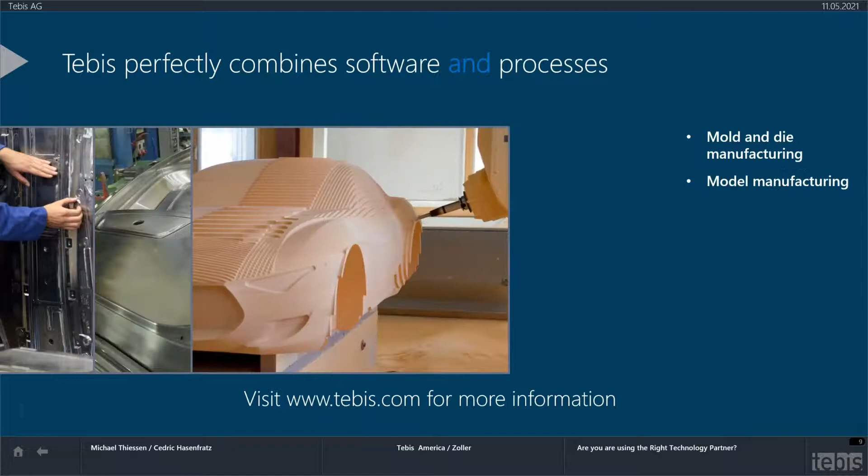Now, what does TEBIS do, and what do we stand for? TEBIS combines all of the software and the processes all together in one, not just for the mold and die manufacturing area, but also for the model, the industrial design, the aerospace, as well as the production machining areas. This is where TEBIS really shows its strength, where we're putting all of the processes in place and helping you as the user and the clients to really get the maximum power out of it.

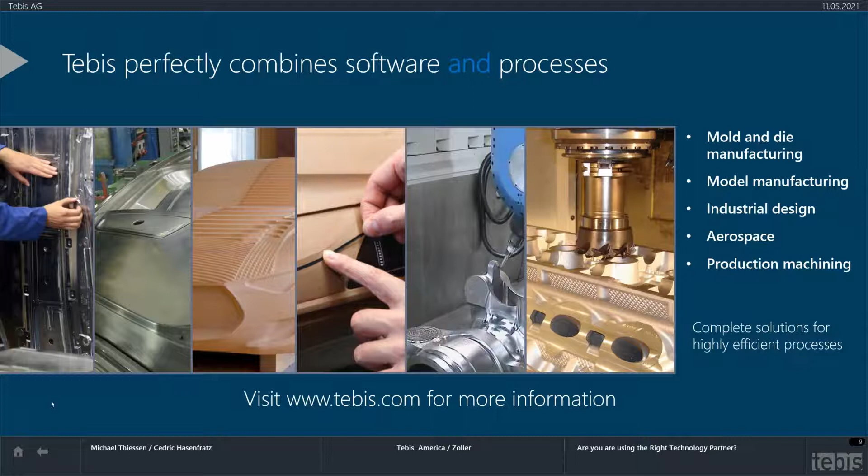Thank you, Michael. We'll look at here and keeping it all digital. So this is the major topic of today, really showing a nice flowing interface that's really nicely synchronized without having to push any buttons and update our tooling source right over to TEBIS. As usual, we have different packages that we offer. We're going to talk mostly today and cover the bronze level on the Zoller side.

And when we open up that slide now, I'll have maybe Michael jump in a little bit too, but you can see here in the first place on the left, you see the tools of the Zoller TMS database, the complete tool management solution, where everything resides and will be transferred right over to TEBIS, and not really transferred, because that's very special today compared to other interfaces that we have. It's pretty much synchronized. And maybe I'll let Michael quickly talk about this slide too.

See, this is the beauty about Zoller and TEBIS together. This is really a handover between the Zoller TMS system and the TEBIS PDM server. Everything is live that we do. There is no pushing of data that comes across where you just copy it and you're stuck with it. That's the beauty of TEBIS, and the principle is exactly how it lays out. It's a live handover, and because the Zoller TMS is so unique, it's a real pleasure to show you this information.

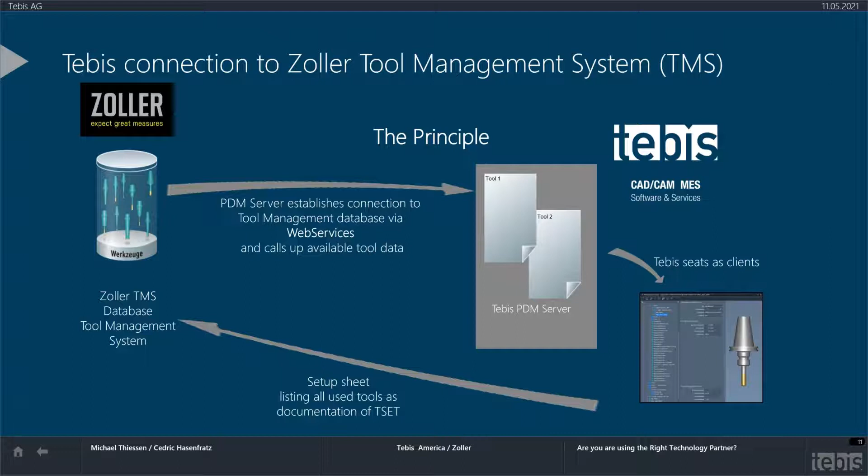Looking at the next slide now, we would like to go more into the actual transfer of the tooling or setup sheets and what we're actually transferring. Again, this is synchronized. We don't need to push buttons, as Michael said. It's a really seamless workflow, so all the updates you make within Zoller will be automatically updated right over to TEBIS from our central tool database, which again will be verified once we push the setup sheet back.

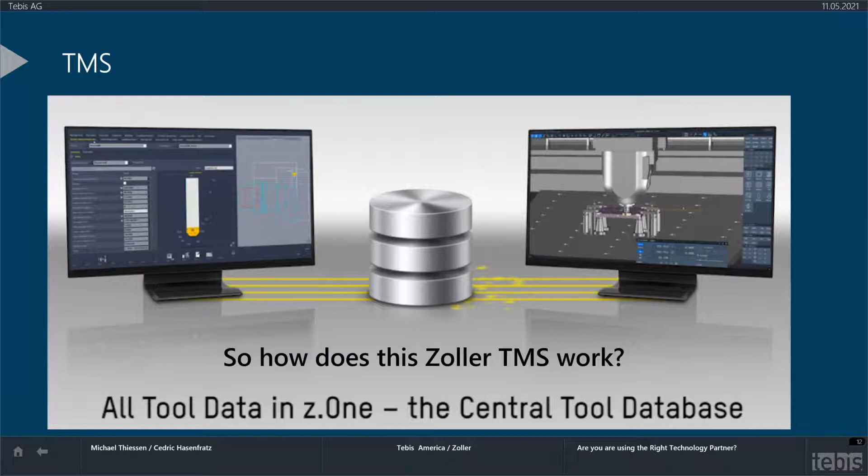The data exchange, basically step number 1 here, is an automated import, as I mentioned. So all the tool data from Zoller is received in TEBIS pretty much at the same time. You have the real tool data being simulated within TEBIS. So all the tools that you assign to each of the tool paths will be simulated. And afterwards, as we verified everything, that data or the complete setup sheet, the job, will be transferred right over again to Zoller to have a clean, centralized database ready to use.

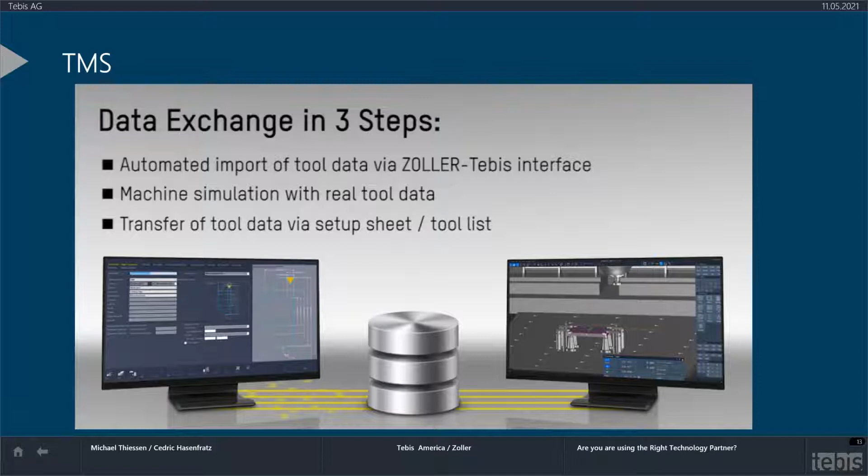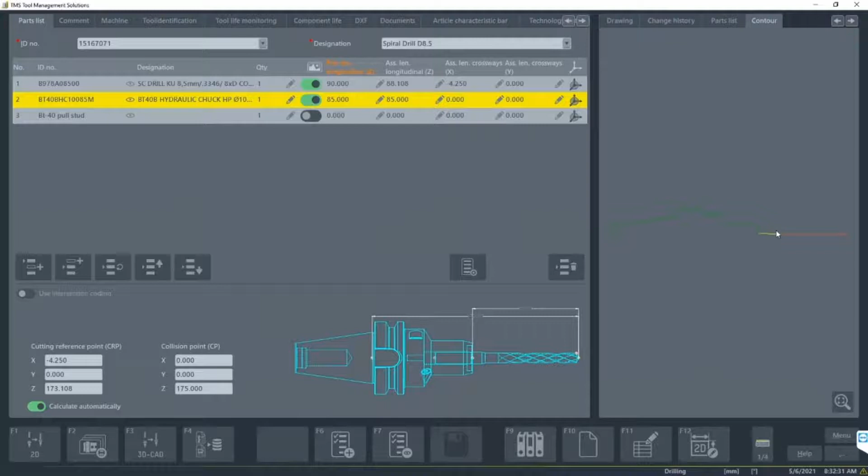Step one. And we're going to make here a little bit more of a live demonstration. You can see here the Zoller interface with our widgets to the right side. We're going to open up our groups. Here is a drilling. You see the group TEBIS. I picked my first drill here to quickly give you an overview on what this all entails. You see graphics. The contour is right there with the non-cutting portion of the tool and the cutting portion, which is in red.

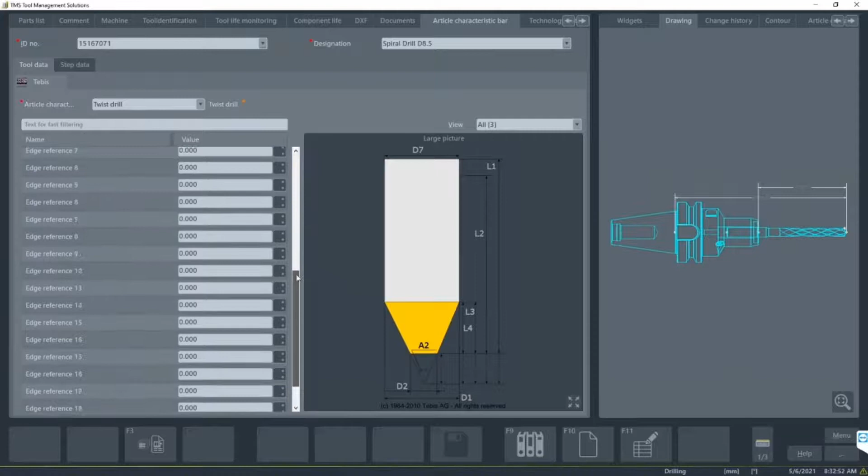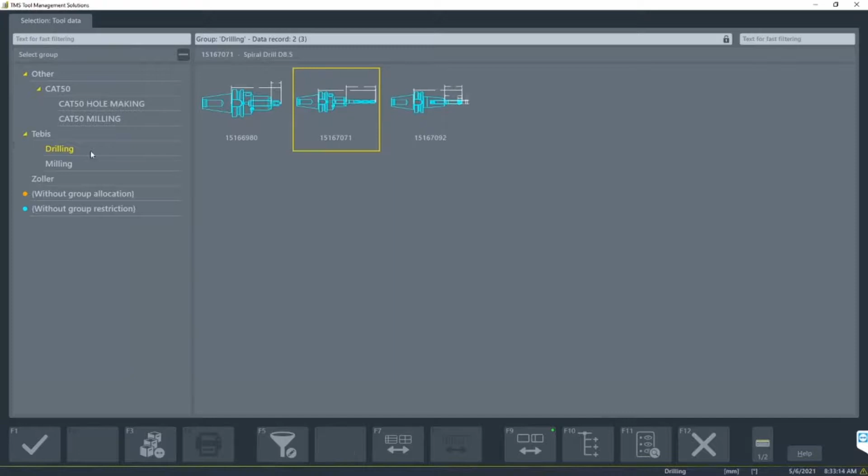Then we also have the drawing, as you could see here, the 2D drawing. Then we got our characteristics, which we obviously want to read into TEBIS. So you can see nicely here all the different references of the cutting edge, plus the diameters of the tools. The technology data comes with that, so we can really define it by different materials, by different machining types. All the speeds and feeds are part of this. And last but not least, again, your complete parts list of that drill. And we're going to look now at a milling tool.

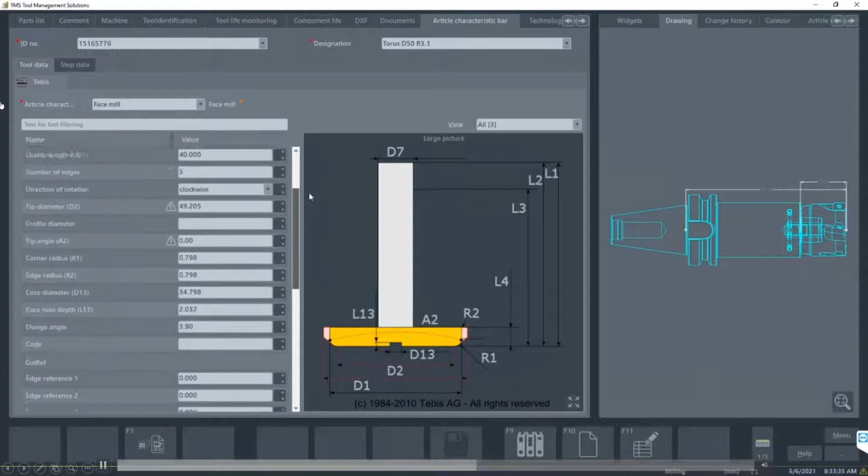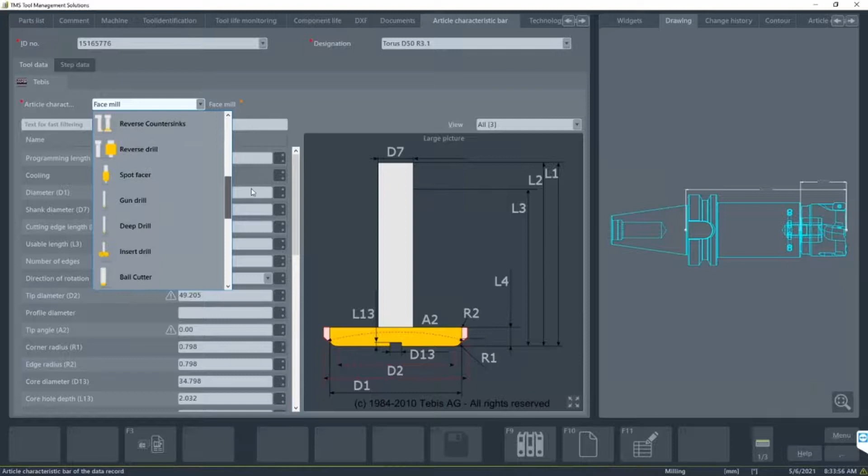So from here, we have the same exact screen with the same information and description of each tool. Here we can see the characteristics of the face mill. Again, same principle based off the ISO standards. We have all the parameters that we need to be transferred over right to TEBIS and what TEBIS is able to read. And you can see there's different characteristics that we can use for different end mills, which is a very big and beneficial feature within Zoller, that you have not just the one end mill or one drill. You can really choose the exact one that you need, such as spot drills, deep drills, and so forth.

So that said, same here, technology data is part of it. We have 3 different applications, 3 different materials. Might go on different machines too that we apply it to. And I give it over now to step number 2, basically transferring the data. So it's very easy, as Cedric already said, really easy with 3 steps. And now he has done his major portion, because we know the tool management system Zoller is so precise with all the items that are in there.

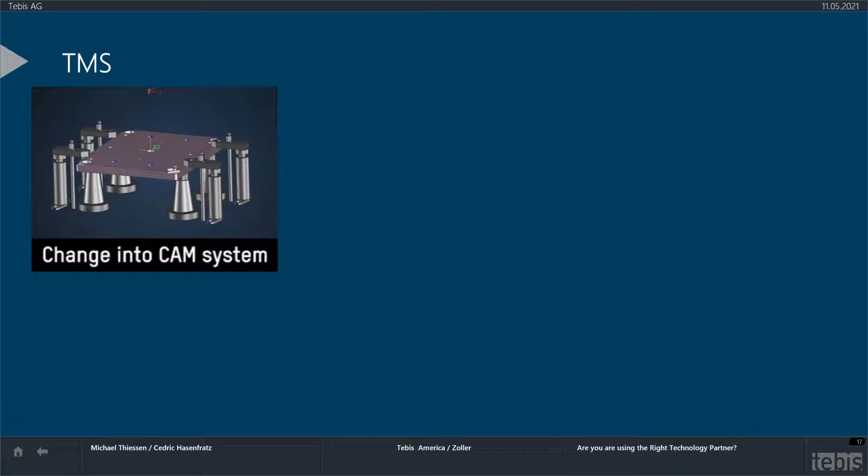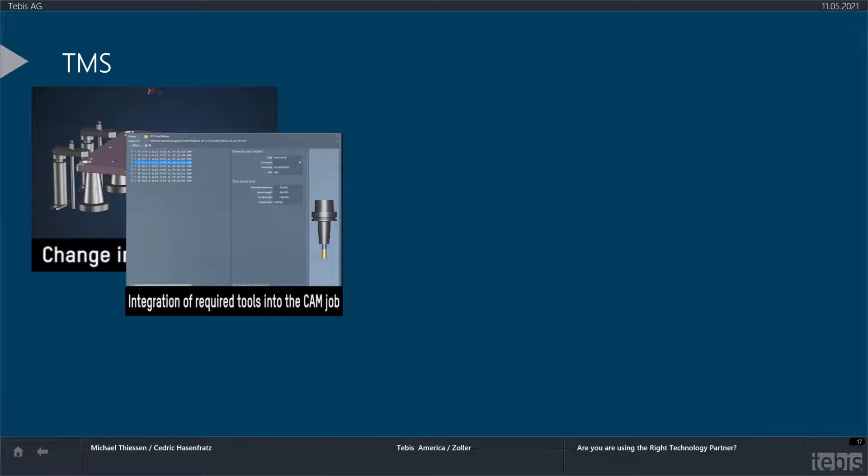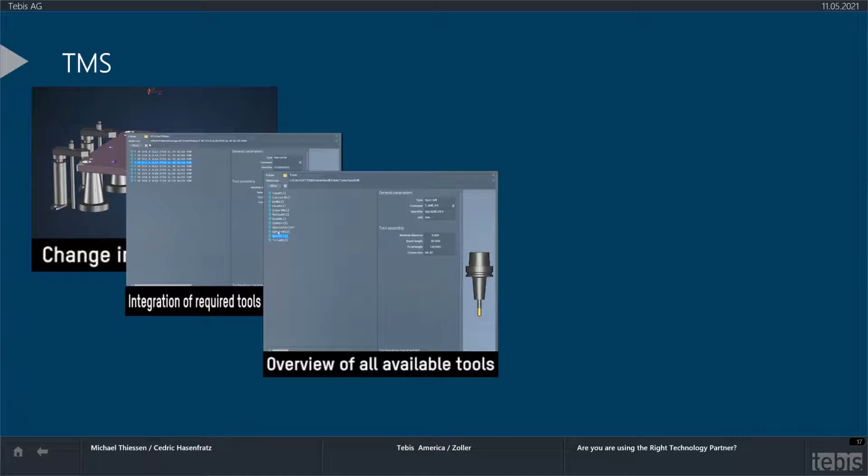Now what's going to happen is I'm going to change it into the CAM system. I'm going to bring it into TEBIS, and there's also a couple of steps that I'm going to bring up here. One is the integration of all the required tools into the CAM job that are exactly defined by the TMS at Zoller. I'm bringing all this information into TEBIS. I'm going to quickly look at all those tools and make sure that all the information came across and verify that everything is kosher. And then after that, I'm going to make sure that all the technology data that Cedric mentioned earlier for all my different materials are also there.

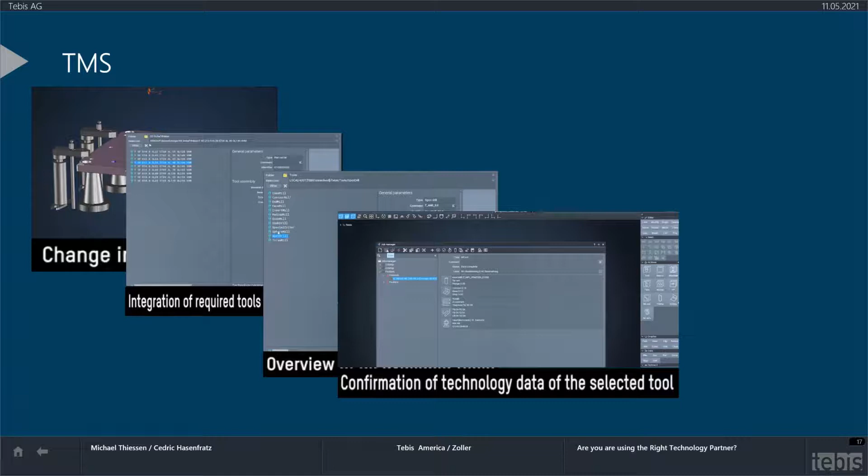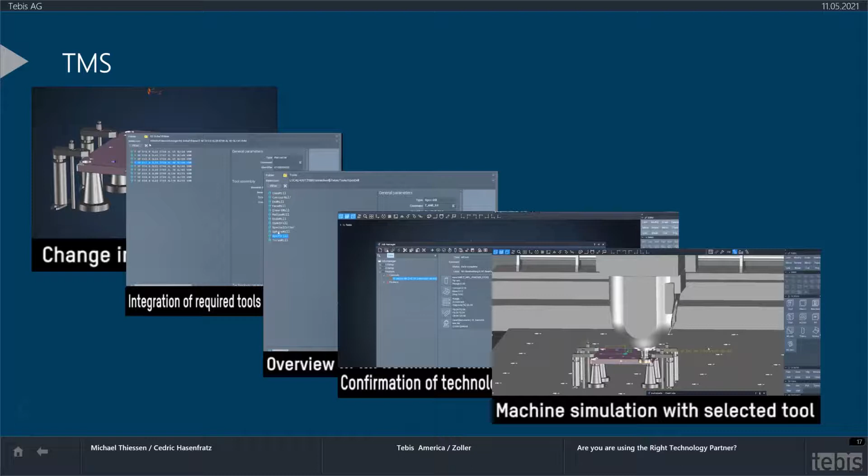And last but not least, as we said earlier, the last step is I'm going to look at the machine simulation and make sure that all my selected tools are verified. So for that, let's look inside the TEBIS environment at how that TMS is really connecting live. So here we got our part. I'm going to go into my tool and let me explain how this all works. As we said already, this is a live connection to the TMS system. So as I'm looking at these tools, I'm sending bits and data across.

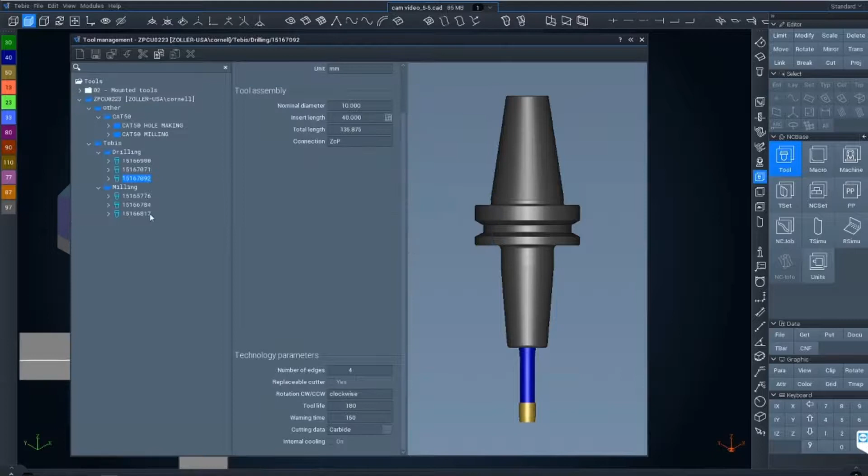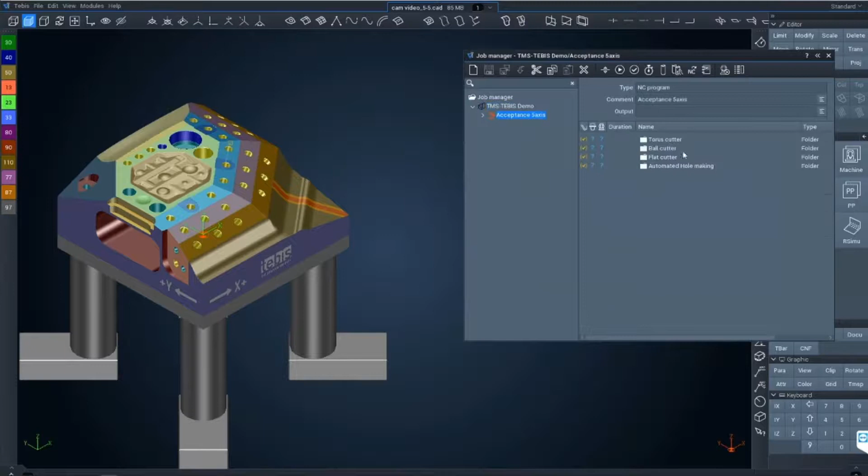I'm looking again at all of the tooling information, the technology data with all my feeds and speeds, my step overs, my technology data on the materials I'm going to use, my step downs. All of this information is already embedded inside the tool. This is why it's so important to have a good looking and good functioning tool library. It's all about automation, and the very first step to automation really is to have a clean, functioning and powerful tool management system and a tool library to house all of this information.

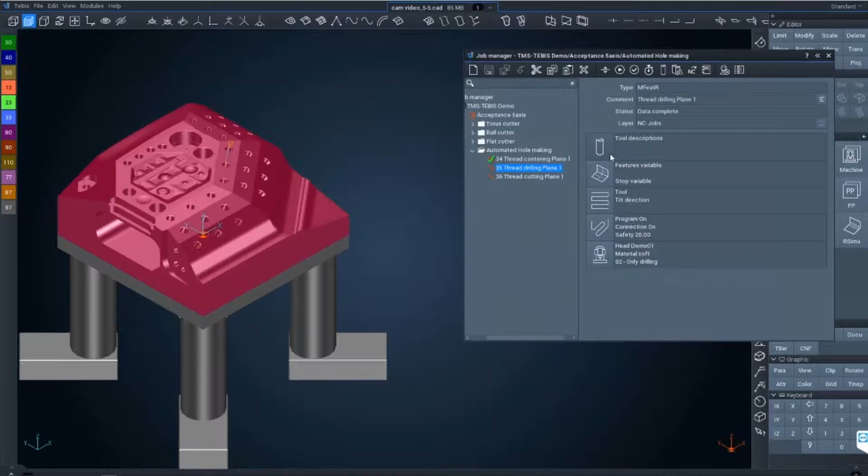So now what I'm doing here is looking at my automation setup. In this particular part, I've set up everything in a fully automated fashion so that my variable tools can automatically go out and select the appropriate tools from the TMS for my operations. Because sometimes I have holes that are a little bit deeper than others, and I need a longer flute length. Having a variable tool setup and variable tool selection, I can now select the appropriate tools depending on my tool type, my diameters and my length. Now, this particular item here is very unique. Even all of my programming efforts are fully standardized and fully automated.

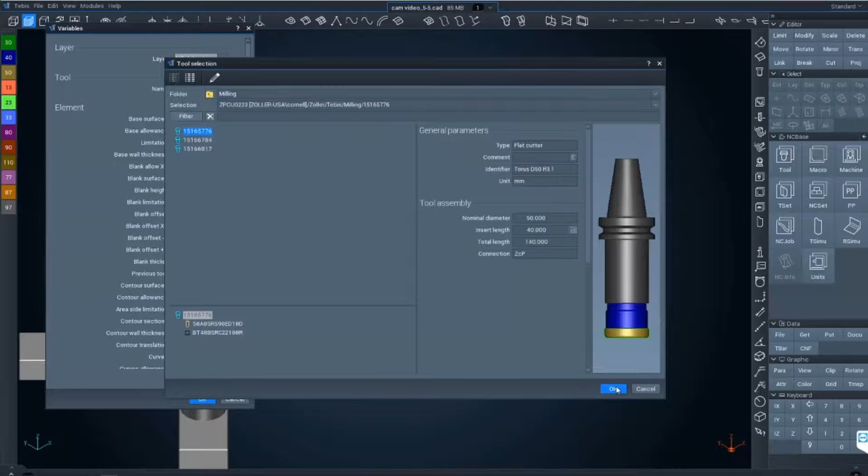Every single item in here, in terms of surface selection, you will not see our experts select any surfaces, because why? The software knows exactly which layer, which object layer it needs to get to in order to calculate the job. This particular job is actually our post-processor verification solution. So we check all of our posts with this tool.

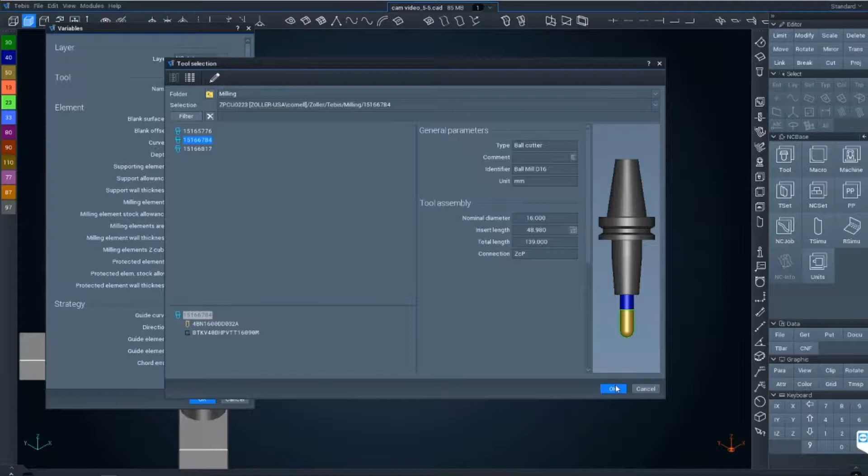So now, again, all of my tools are there, all of my technology parameters are there. All that I really need to do is execute all of this. And the biggest thing besides the automation is the standardization. Standardizing your way across your entire shop floor. Having your tools with all your technology data available. Now it's just as simple as saying execute all, and you will see all your check marks are going to get filled in by your tool path.

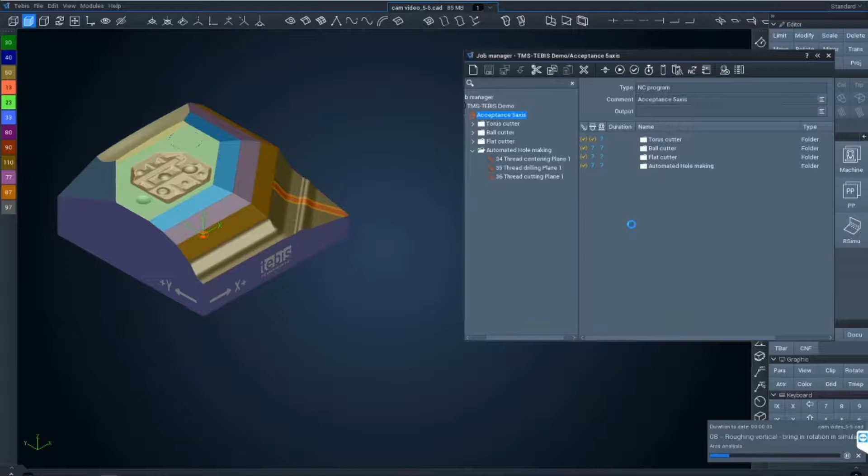This is live, it's not pre-programmed. So I'm going to hit execute, and you will see these tool paths getting calculated. On the bottom right side, you'll see your progress bar, you see your check marks appear. And what I'm doing, which is also very unique, it not only goes through and does all the programming of this particular part, but it also automatically does a tool check to make sure that the tool the TMS has given me is safe for its programming operation.

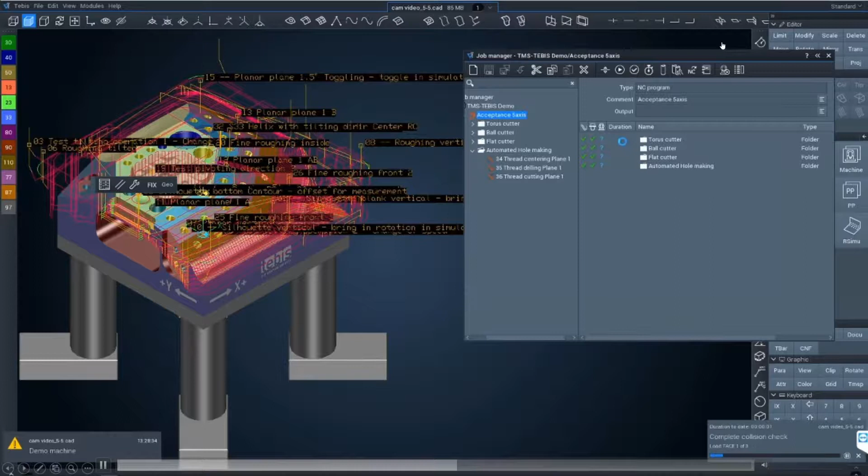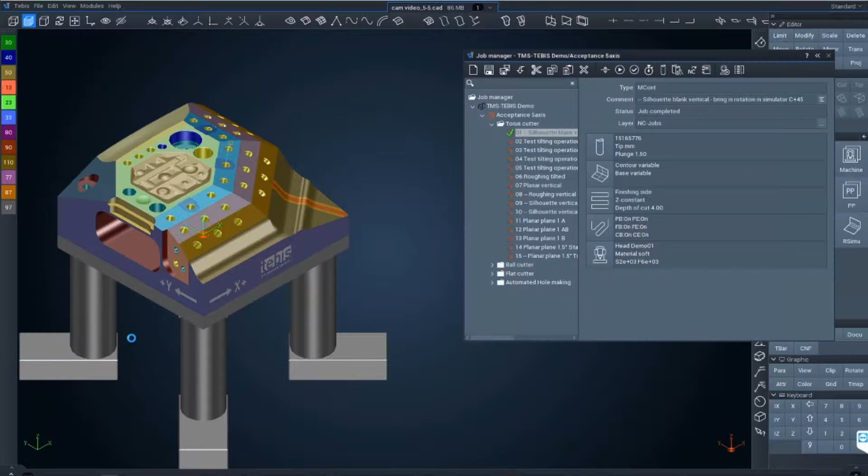And now the last step, fully automatic, I'm going to go through and simulate every single movement and every single item on this particular job in my full simulation. So now this job is ready and capable to run on the machine completely unattended, completely lights out, and it gives me real characteristics of the machine kinematics outside the machine with real numbers on the machine runtime, because I'm utilizing the kinematics, the acceleration parameters and the look ahead on this particular machine.

Very unique, very accurate, so you know exactly when this particular machine is going to go through with its programming. And every single motion that this machine does is completely verified. Even the tool changer. When the tool gets exchanged, we're checking the simulation over to the tool laser.

Because at the end, we need to recognize this. The tooling that you've purchased from whatever tool supplier you have is not a cheap amount of money. It is probably very expensive, these new tools. So keeping these tools as new as possible is very important. That's where the realism comes in place, making sure that the realistic view on this particular tool and all of its motion inside the machine is 100% identical.

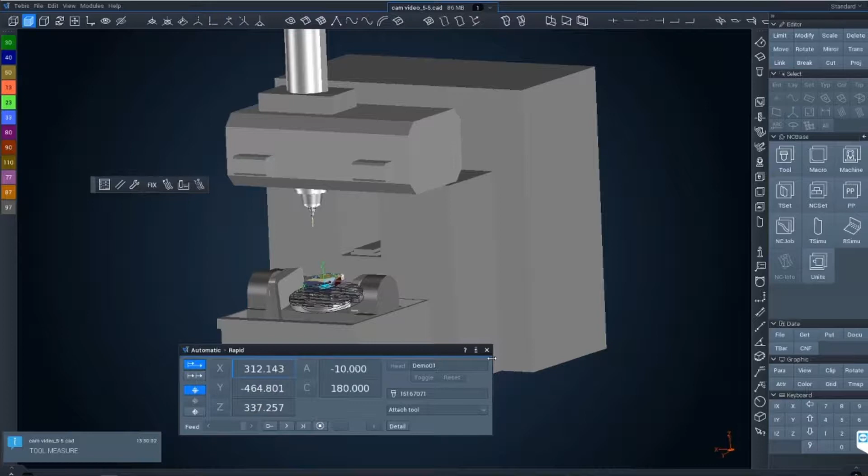I'm going to talk a little bit later on about the tooling, but I cannot stress more how important it is to have accurate tool information with all of the feeds and speeds and the parameters embedded already from the beginning. And now I'm going to do full automatic documentation for all of my programming efforts, fully automatic. I don't have to touch anything.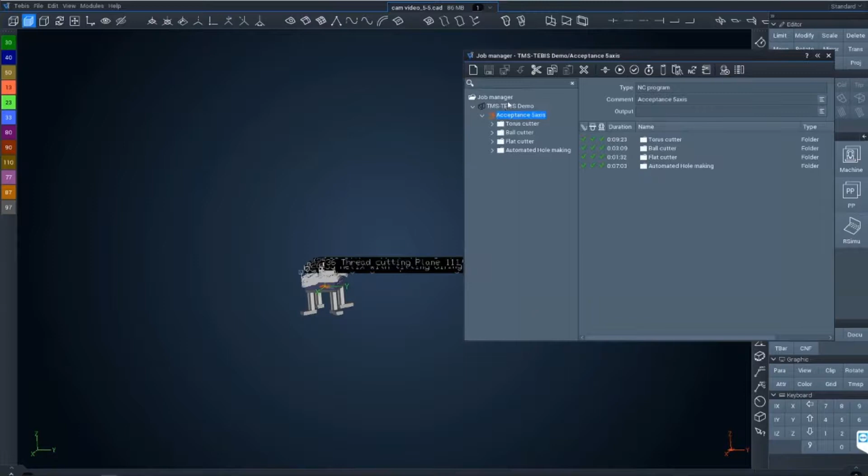I put the file name in that I want to call this. Maybe I want to put an additional comment slide with an additional picture. This is all doable. This is what my expert is doing right now, just putting a description in there. You can add a picture to it. And now your team outside by the CNC machine has the exact lineup, the exact programming of your part in a nice list format that they can follow. And they can even have a viewer by the machine to really put the realism to the next level.

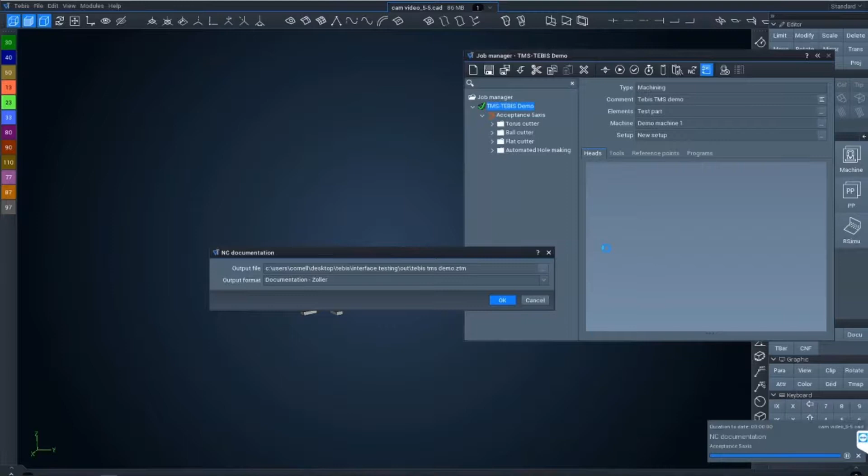This is how important this TMS connection to TEBIS is. And this is very unique, and I cannot stress this more. It is a live connection to the TMS. It is not a dump into a directory where you have to re-post it out from the TMS. It is a direct connection. So now, after I have all of this done, I'm going to hand it back to Cedric, because there is this step 3 that we're going to be talking about.

Thank you, Michael. I really like what you showed us today with a really good verified simulation. Looking now at the next step, we want to bring our tooling back to Zoller. Everything is verified and we have correct tools. Everything is assigned. The part is done. We have a finished part.

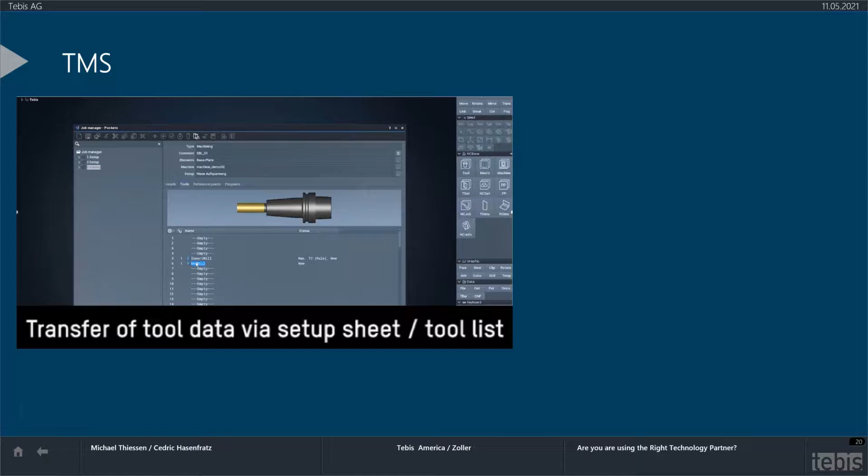We would like to bring everything back now as a complete setup sheet. So let's transfer all the tool data via setup sheet or tool list to the ZOLLER TMS single source database. As we can see right here, for our ZOLLER customers, everything looks familiar.

We have here our tooling, and the actual screen you see right in the middle is the same exact screen as you usually see on the presetter. So all those measurements are still part of that too, and the actual DXF graphics right to the right side. So let's see how this actually looks.

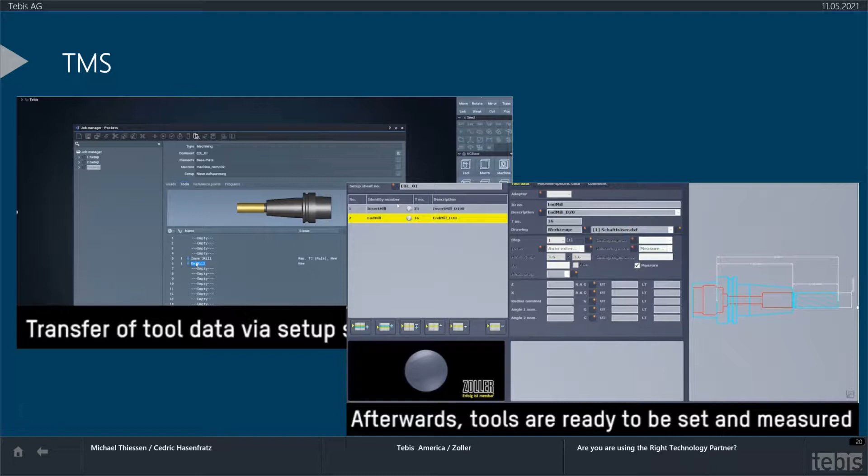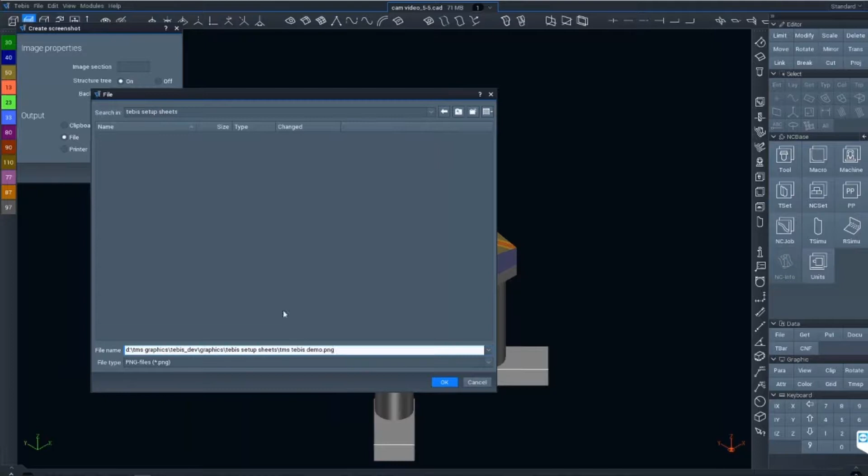With the demo piece of it, we have here the finished part view, which we basically want to also bring as a part for our setup sheet and give this a quick section name with the actual file name to it, like Michael did, and confirm that. So we're going to just put here the TMS TEBIS demo part and confirm this right over now to our database. So that finished part will also now be taken as a screenshot that we can have as part of our ZOLLER TMS setup sheet, our tool setup sheet.

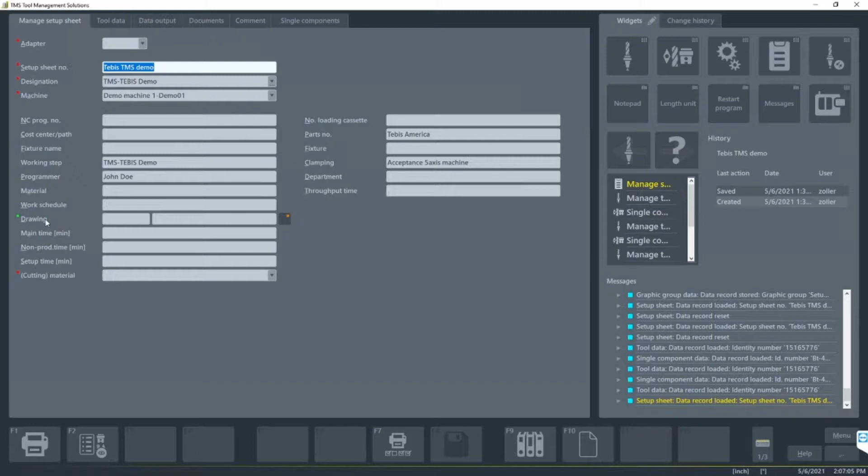So here we go. This is our main page for the setup sheet. We're going to look right here with the live connections, the TMS demo. We have the drawing now that we can pick from our graphic folder. And here's your finished part view that we now confirm and is now part of our setup sheet. Pops up right here on the right-hand side.

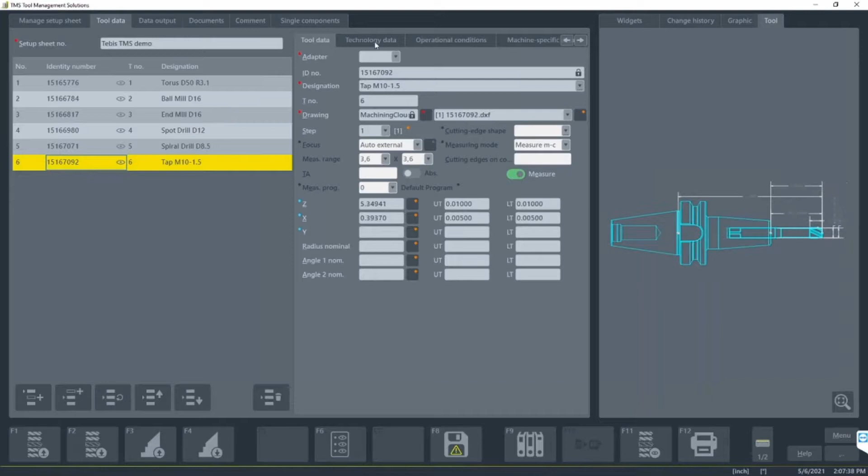Let's take a quick look again at the tool data. So again, to the left, we have all the tooling information, where you can also look at the contours and the DXF graphics. They're part of it now. And of course, again, all the measurements that we have from our presetter with the Z and X tolerances and the actual measuring modes. Technology data is part of the setup sheet that we have. We now can save this. Everything looks good.

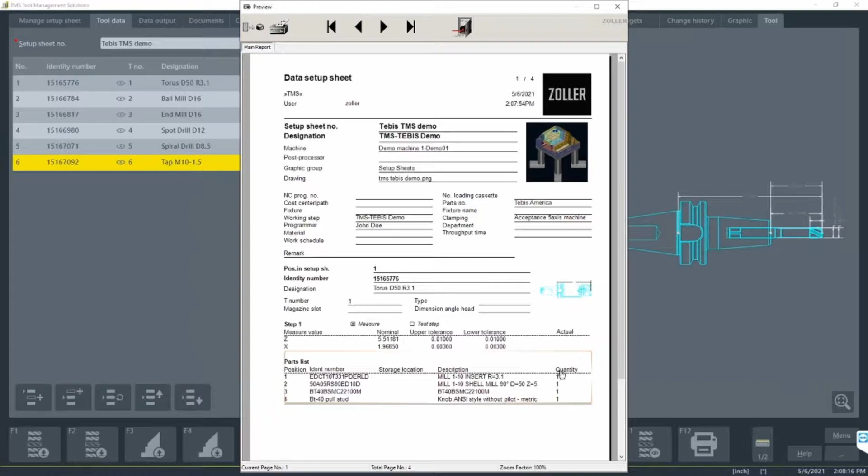And last but not least, let's take a look at how this actually looks on paper. So you can either have it as a viewer license and just view it that way, or simply make a printout as you can see it now with the finished part view, a graphic attached. Also, we have the parts list of each of the components and what it entails on how this tool is actually assembled. Again, this is all now verified through TEBIS, and we have a clean single source database that we can choose from.

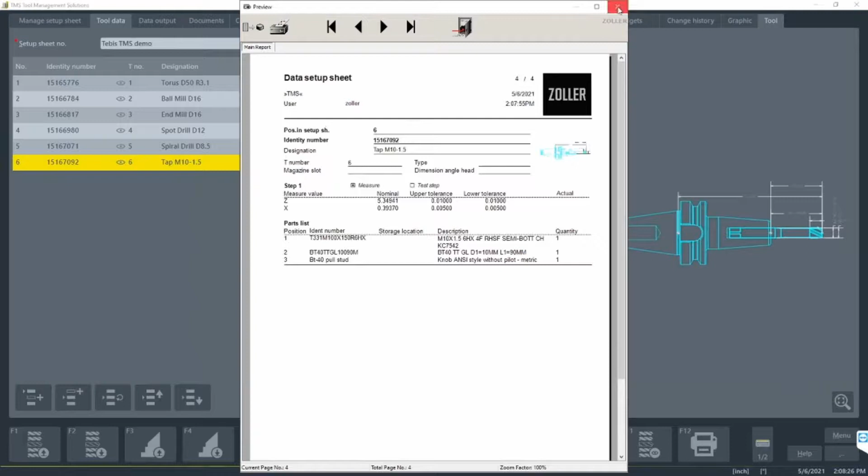Tool by tool, all the information is there, even some steps that we took from the presetters, all the measurements in it. And for every tool, the whole parts list is part of it. That kind of completes the step with the setup sheet, and we're going to head over now to the benefits, which Michael and I will share with you together on what's really important, why we are interfacing or basically synchronizing our databases, and what's your advantage.

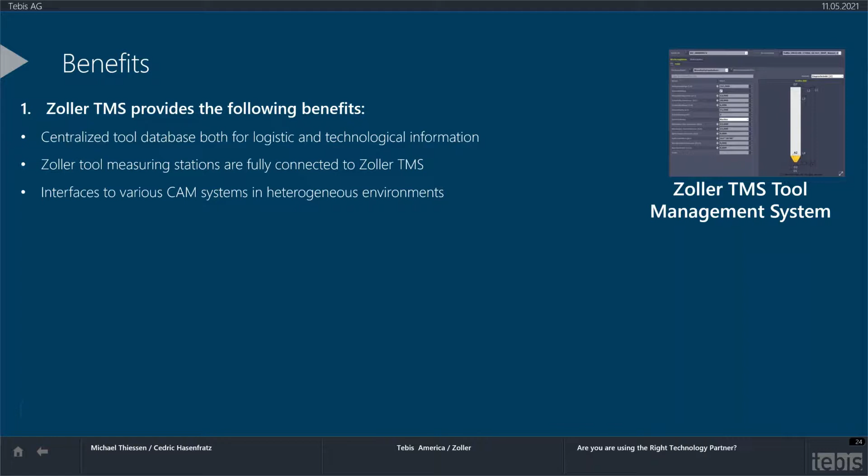The first one, for the ZOLLER side, is it really gives you a lot of benefits to have that central tool database, all the technology information. You can look at the complete tool measuring of the ZOLLER TMS with your presetters. You can also interface with other CAM systems. So if you have certain tools that you might use with an additional CAM interface, you can just go right back and bring it in from ZOLLER. What about TEBIS? I'll let Michael answer that question right here.

But it goes much further, because the benefits are all about reliability. Having a TEBIS PDM system in the background that is buffering the data in case the ZOLLER TMS becomes unavailable due to some outages or whatever, you never run into a situation where you don't have the tool available, because we're doing this buffering on the back end.

Now, obviously, on the standardized connection side, with TEBIS we can implement this very smoothly in existing environments at companies, and this is how we can bring across the entire tool assembly from the ZOLLER TMS system that is really managing all of your tools, all of your inserts. And I believe, Cedric, even if you're running out of inserts, the TMS can alert you that you don't have this particular tool available, so you don't even program with it. Hopefully I'm stating this correctly. 100%.

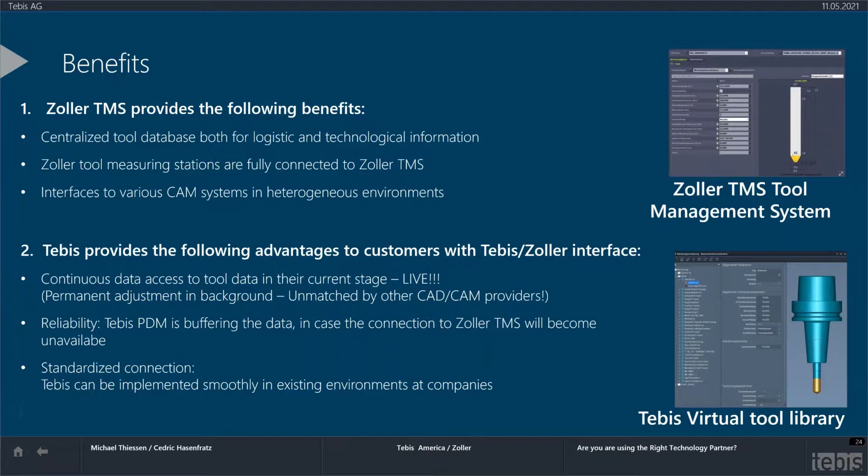Perfect. So from that side now, I'm going to take a detour quickly. I'm going to say, well, there's much more than just looking at the TMS between Zoller and TEBIS, because we said everything at the starting point with the tool needs to be there. And if it's not there, then there's a problem. So what I'm going to say here is we have the Zoller TMS system here.

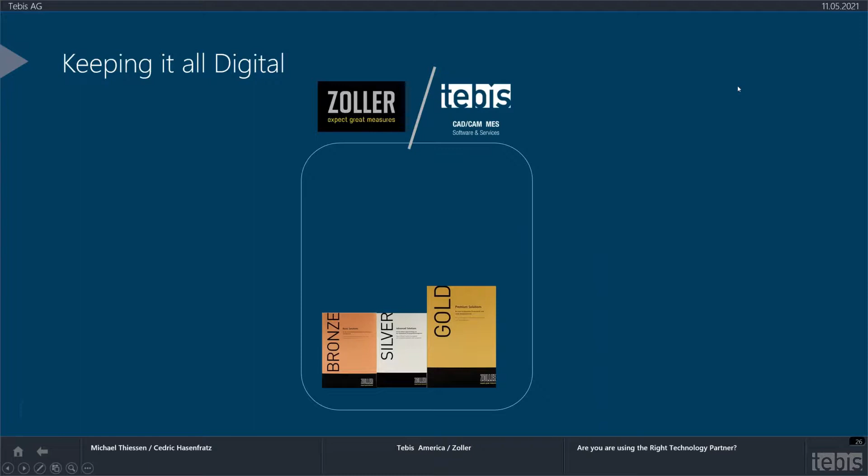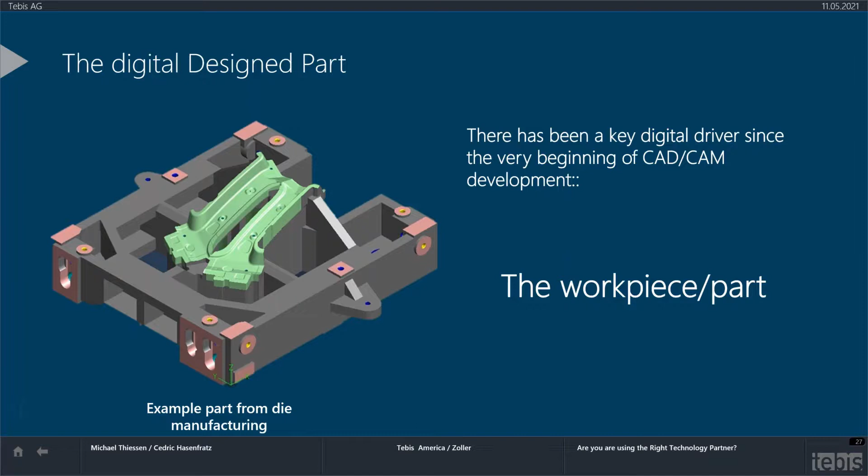Let's look at one more item that's completely digital, which is, of course, your part. It is your part that you manufacture. It's a digital item. It is the job that you're working on. It is your initial digital twin. This is where it all started. It's your workpiece and your part, completely designed in your CAD/CAM system or your CAD system, and we're bringing it inside TEBIS. But that's not the only item that we're dealing with.

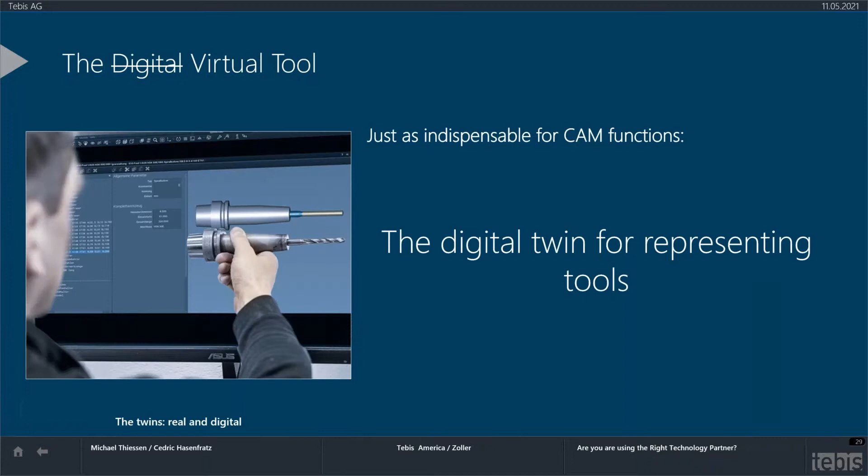Of course, we talked the entire time already about tooling. Tooling is an important aspect of keeping it all digital. Without digital and a virtual tool crib, as we call it, there's nothing that is more important than having the exact replica of what you're dealing with in a CAD/CAM environment, virtual as well as in the realism. So let's look at just some different examples of tooling that you have.

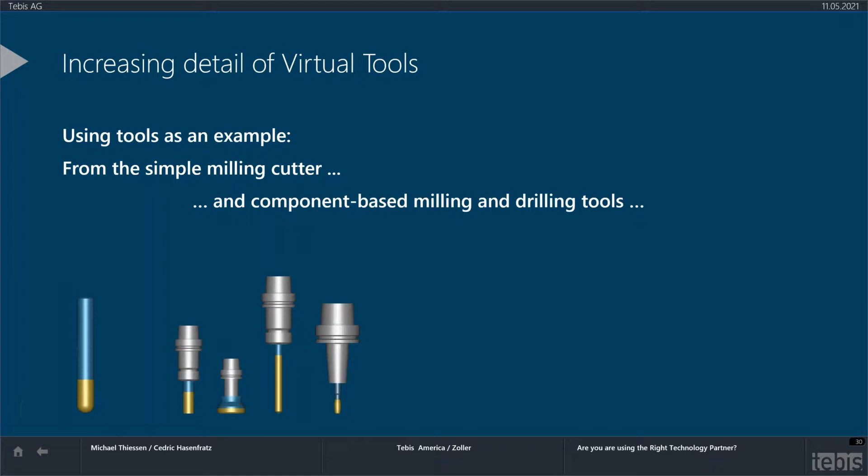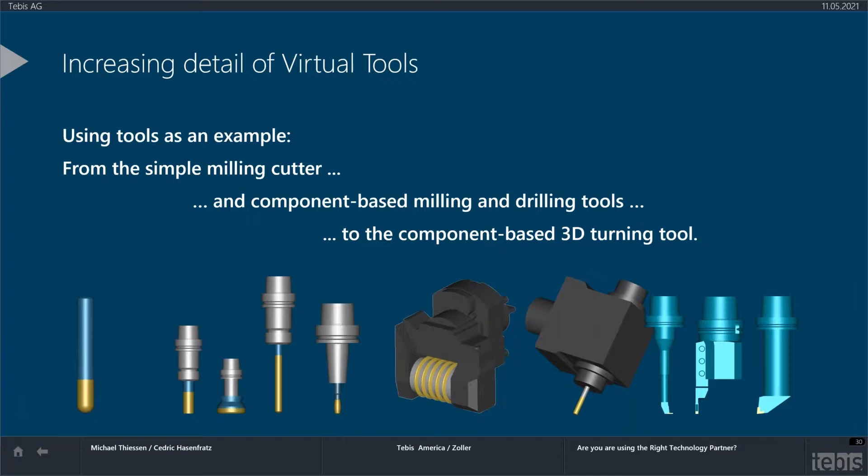So if we now look at these imports, how can I get this realistic tool inside the CAD/CAM system? Of course, we have Zoller here. They have their presetters. They can scan the tooling and the holders and bring it right into the TMS, or we can connect with different kinds of manufacturers. If that's Moldino, Pokolm or Aura or other tooling providers, they have on their website their formats that I can bring in.

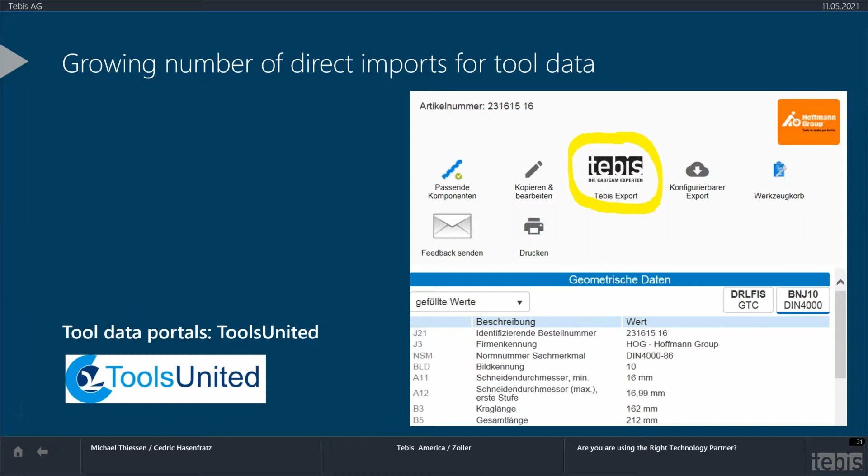Or I can also utilize the Tools United portal and have a direct TEBIS export, so I can bring this tooling directly into the TEBIS environment. Again, talking about realism, accuracy, and efficiency in programming. So having this tool information here is super important.

From there, I'm going to go to the virtual machines. You probably have a dozen machines sitting out there. How am I going to make sure that nothing is going to happen on this machine with the tooling that Zoller has provided to me? It became clear to us, especially during this pandemic, that programming without a virtual machine is almost impossible. Some of you are still stuck at home, programming from home, and without simulation such as TEBIS that simulates every single movement, it's almost impossible to keep your machine safe.

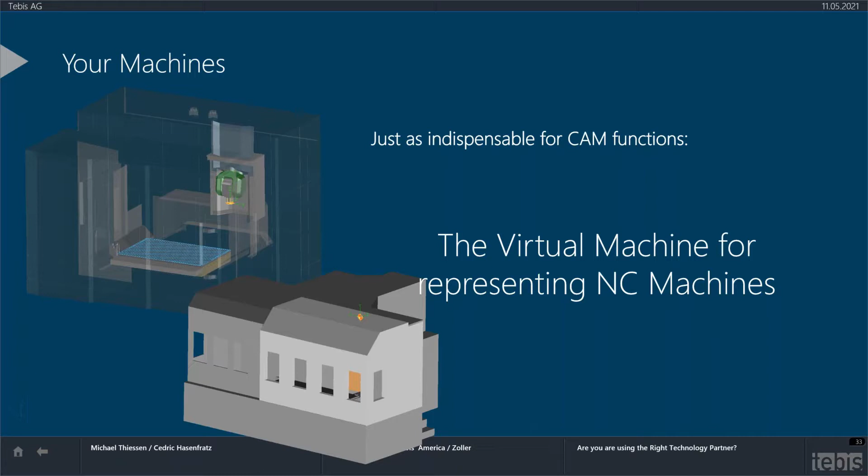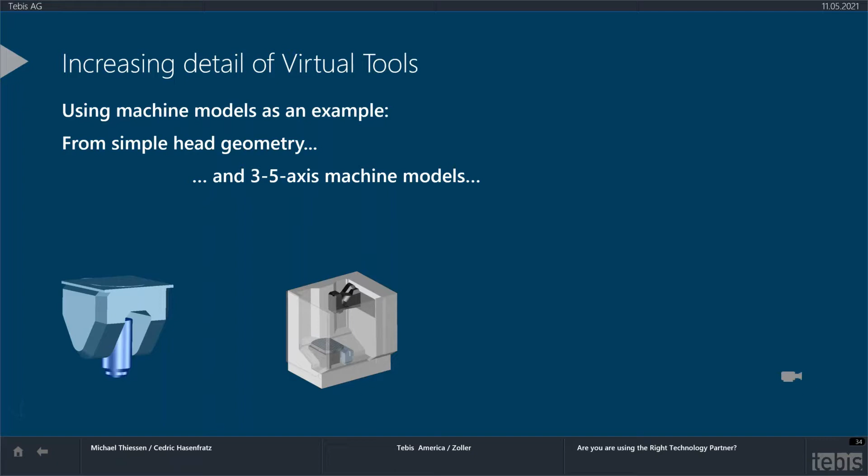What did we do in the past? In the past, we just utilized your regular head. That was the technology of yesterday. Simple head geometry. Then we moved on to very simplified 3 or 5 axis machine models. From there, more complex kinematic models with 5, 6, 8 axis gun drill items. Just to show you the different types of machines that we're running into on a day-to-day basis and how complex these things can be, let me show you a few of those.

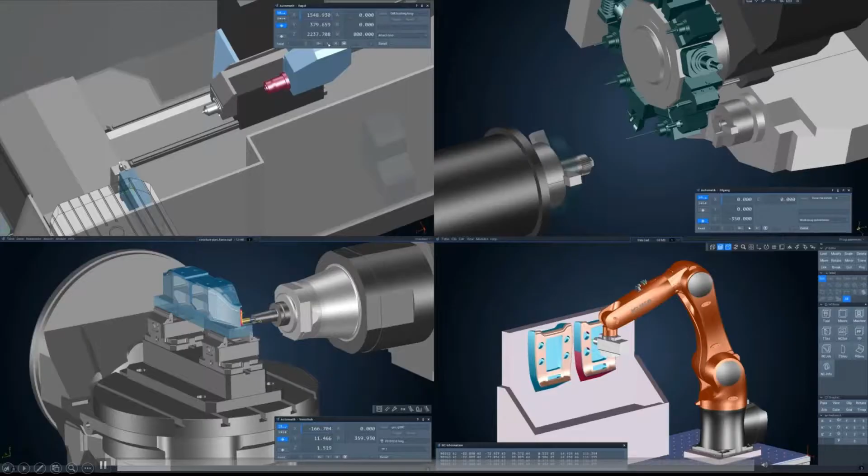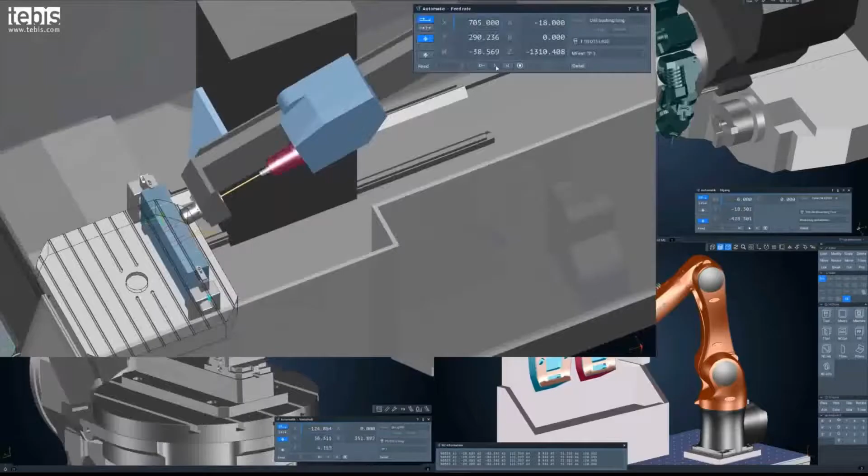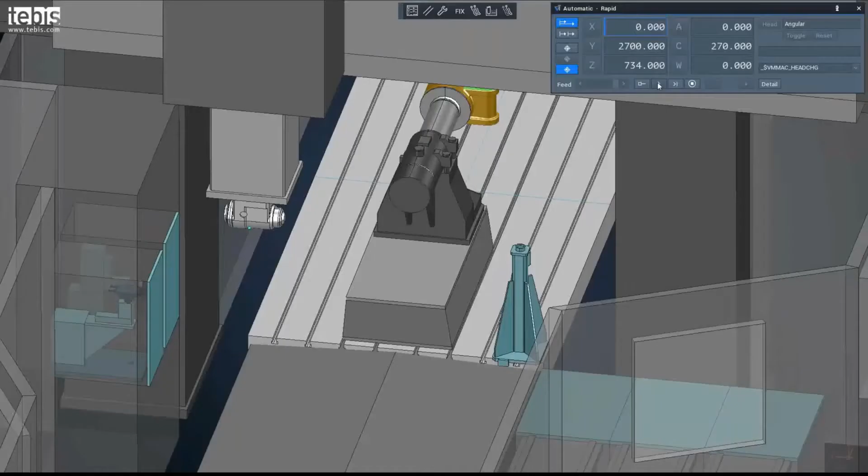These can be your simplistic 5-axis machine or your most in-depth 5-axis machines for aerospace, for mold and die use, but it could also be your regular NTX machines, your lathe, your turn mills, your mill turns. You need to have representation for all of your types of machines, if it is a gun drill or a deep hole drill, but now also the latest and greatest thing is utilizing robots for milling operations. A CAD/CAM system such as TEBIS in connection with the TMS and Zoller is such a unique combination. Having every single item in a realistic fashion is definitely key.

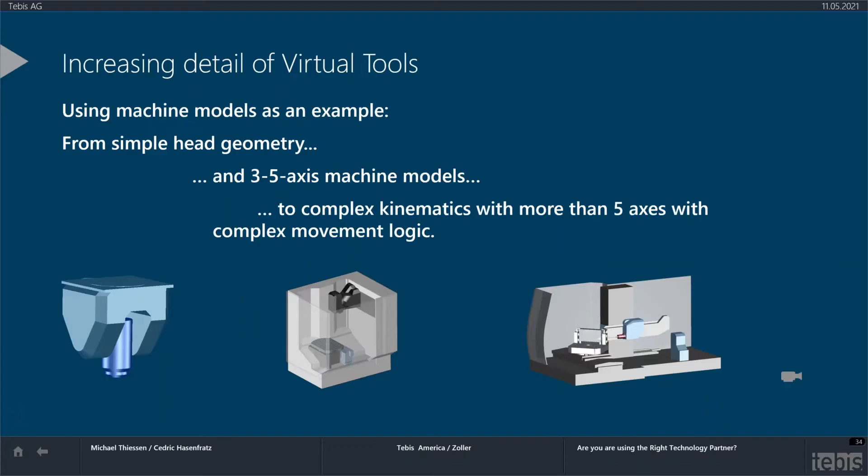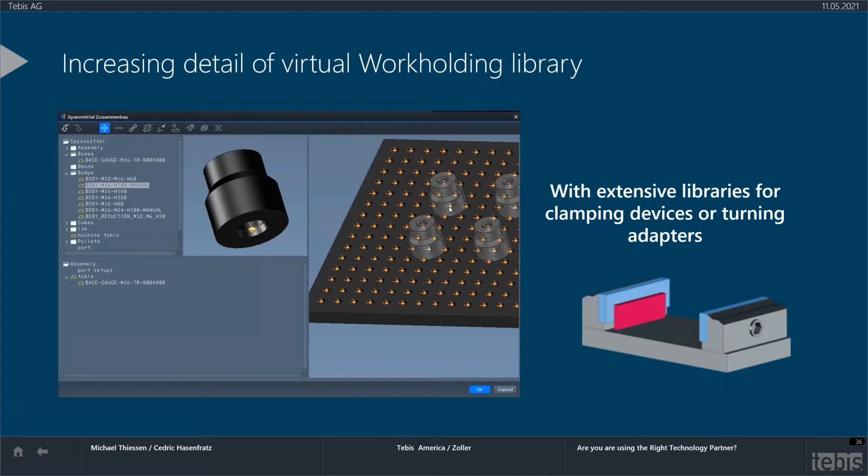Well, let's move on from the different types of machines, and there's more to it. There's one last item that we're utilizing in these machines, and that's your clamping devices. Having a clamping library available with all of your different clamping devices, if that's a vise or your FCS equipment or other work holding fixtures, is important. Why? Because you can run into this inside your machine and damage your tooling and the machine. How are you going to get this all now to the machine is always the million-dollar question.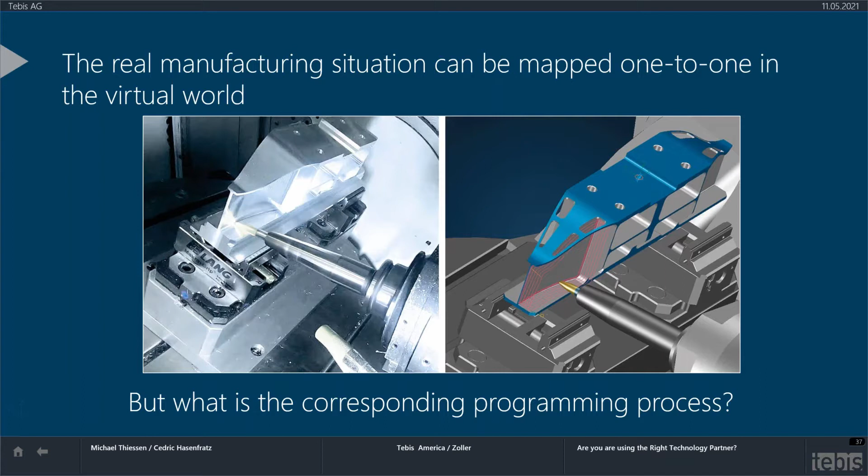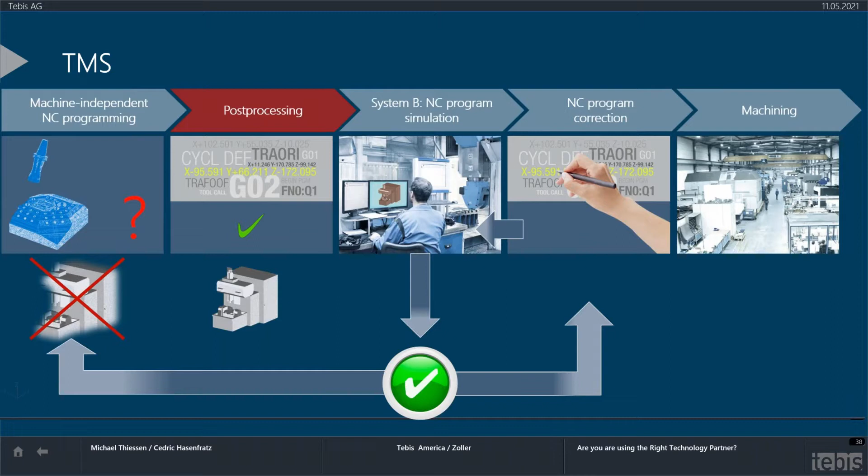What is TEBIS doing that is so different from all the other systems that are out there? Well, for that, I need to look at some of the other systems and what they're doing. So there's the idea of machine independent NC programming. Then I'm posting, I'm bringing it into a simulation equipment, and if I have any kind of problems, I'm looping back around to my CAD/CAM system, redoing it again, checking it through again, and then once finally I'm happy with what's going on, I'm posting it out and sending it to the machine.

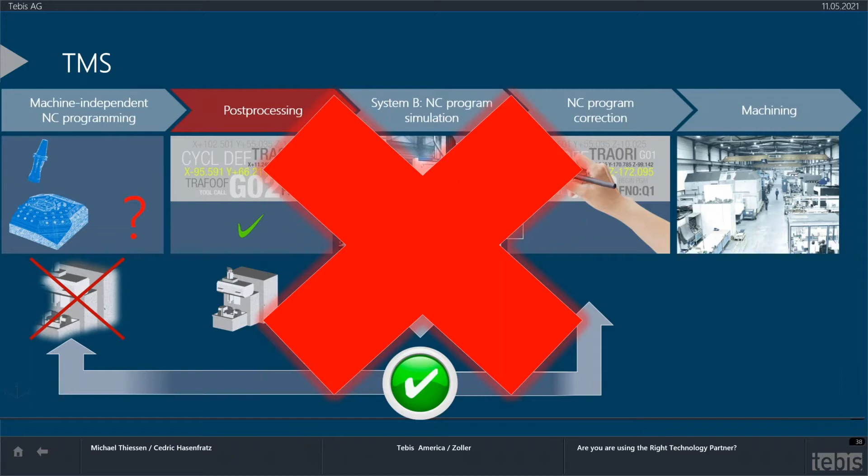This is where you would hear the big buzzer sound and the red X would come up and say, this is not the right way of doing it, because it's not efficient. It's not the best way of how you should be programming. Let me show you what TEBIS does in order to keep your machine safe, and that's the TEBIS philosophy. And that is very simplistic. It is machine dependent NC programming.

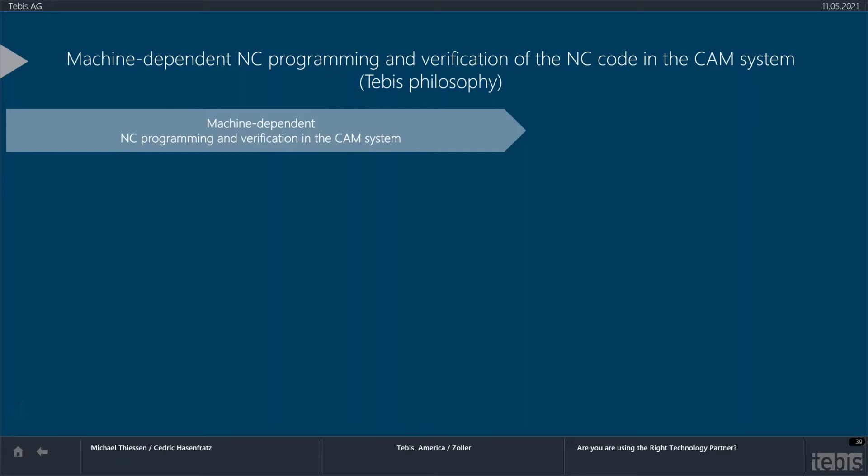I'm utilizing my machine right from the beginning on, and with that, I'm utilizing not just the machine, but my digital twins, my libraries for my machines, for my devices, for my vices, for my programming with all of my different items that I'm utilizing. I'm cramming them into my system, the exact tooling from the TMS, the exact vices, the exact holding equipment, and then from there, after I'm done the programming, I'm post-processing directly and then sending it to my machine. Very simplistic, very straightforward, and very exact.

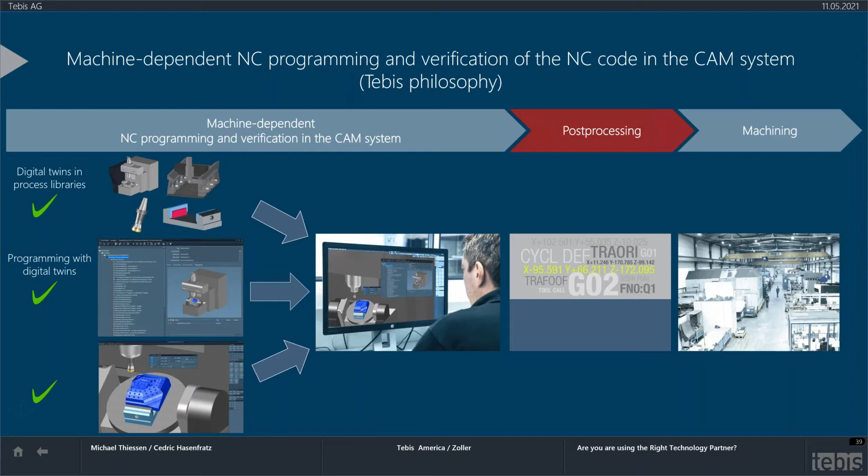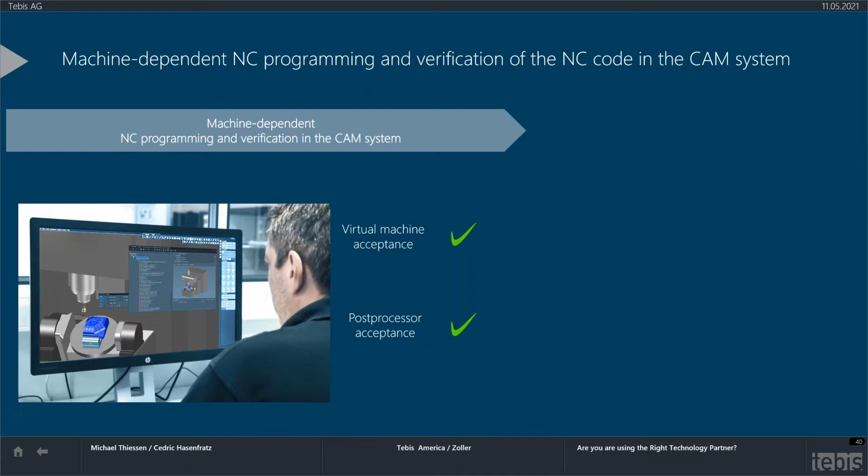But this is when a lot of the naysayers come: well, but what if, well, you can't verify the G code. Well, let me explain this to you. We virtually check every single machine, and we check the post-processor, and you've seen this part earlier. We check every single machine and every post-processor with that part for every single function that you could run into. Once this is accepted, once we have verified that this is correct, then we're moving on to the next step and post-processing this job and sending it to the machine.

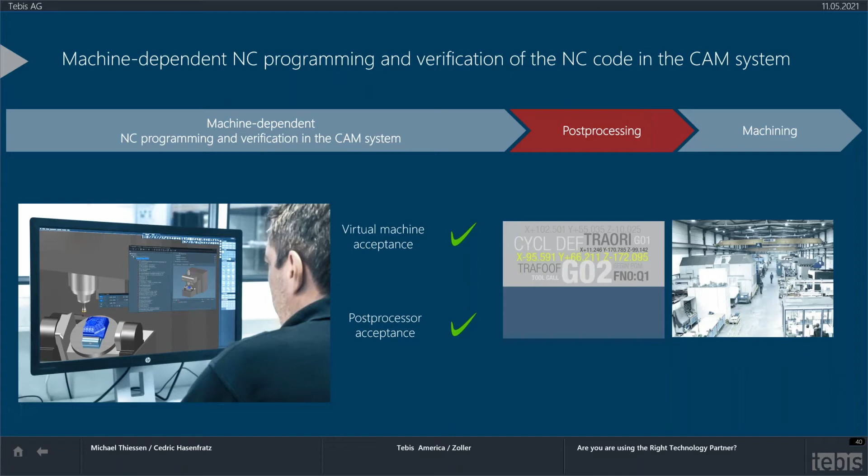And this is how we keep your machine safe. And this is why this is so important. The tooling, the holding equipment, the machines, all of these things need to work together in unison, because then we're keeping it all digital. There's one item that we've left out in today's webinar, and this is the last point I'm going to bring up, and I'm going to hand it on back to my friends over at Zoller.

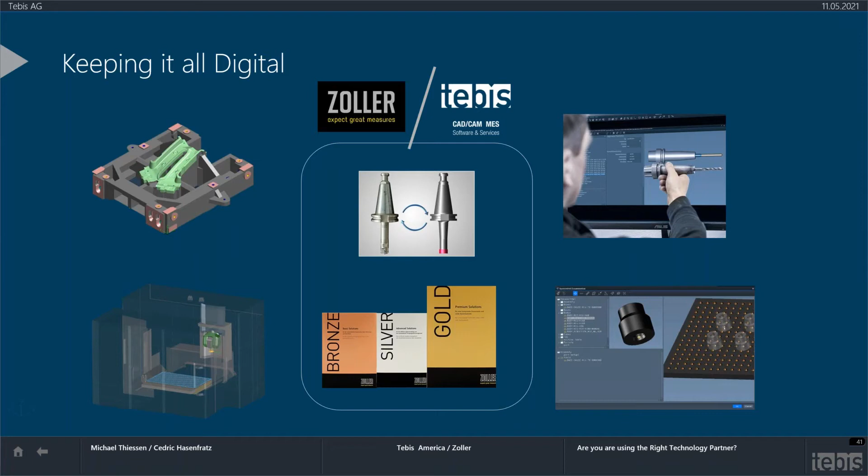And this is the Zoller tool match. We've not talked about this enough. It's very unique to Zoller and to TEBIS. Again, unmatched, and this is where our development at TEBIS and Zoller is so unique, because we come up with these unique ideas. What is tool match? Tool match is the ability to keep your machines collision-free. It increases the unmanned run times.

All right, well, Michael, thank you so much. And Cedric, thank you for your presentation as well. As we refocus back here on the big question for today, are you using the right technology partner? And you look here at the combination of the Zoller TMS Tool Management Solution with virtual simulation and TEBIS tool match. I think we've answered what it means to use the right technology partner and how beneficial that can be when you really have a symbiotic relationship between the technologies and the partners that you're working with. You really do start to see the incredible power that this can offer you for your process.